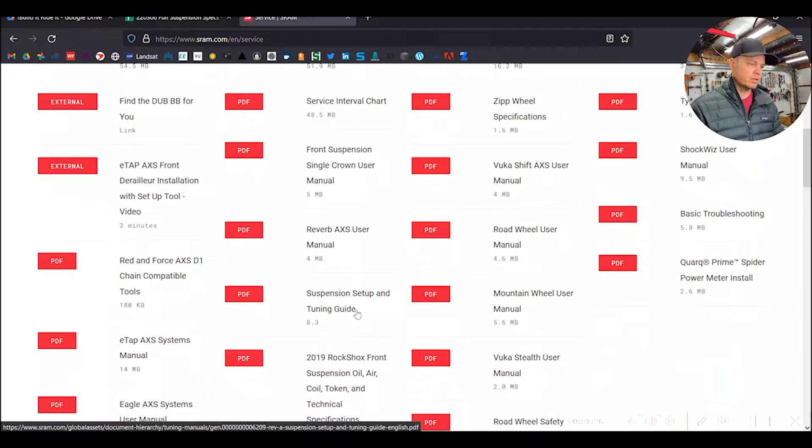Axle to crown, this actually comes right from SRAM's specs. They have them on their website. So if you're looking for this information, I haven't seen anything terribly updated, but if we go to SRAM's website, and if you scroll down to the bottom, which is manuals, documents, and videos, they have, for 2019, luckily for me, these technical specs.

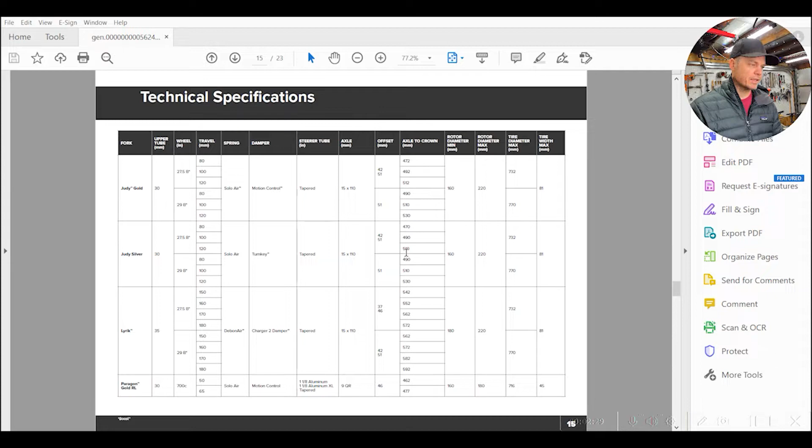I was looking through some of this other stuff, and I didn't see anything equivalent to this to show the axle to crown. They used to have the axle to crown specs actually in the literature on the web page for a particular fork, and maybe they do now again, but they took it off for a while. So anyway, if we go in here and we open this up, you want to go down to technical specifications, zoom in a little bit.

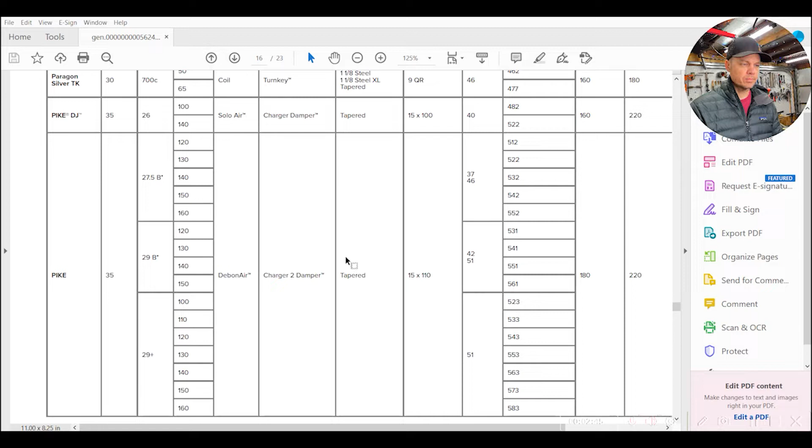If we find the Pike, these are the 29, and then I've got a 51 offset. So 130 travel, come across, the axle to crown is 541. So that is how I got to this number.

Sag, what we're going to be running in sag is basically the percentage of the travel that when you sit on the bike, the fork compresses that much, right? So the travel is 130, 20% of 130 is 26 millimeters. And so that means that sag axle to crown is 515 millimeters. And then, like I mentioned before, the rake or the offset, it's 51 millimeters.

So, all that to say, that's really the starting point. We need to know our axle to crown and our rake as we start to go down the path of actually drawing the bike. So first thing I do, I just draw a vertical line and I offset it 51 millimeters. And then I connect these two things. Zoom out a little bit.

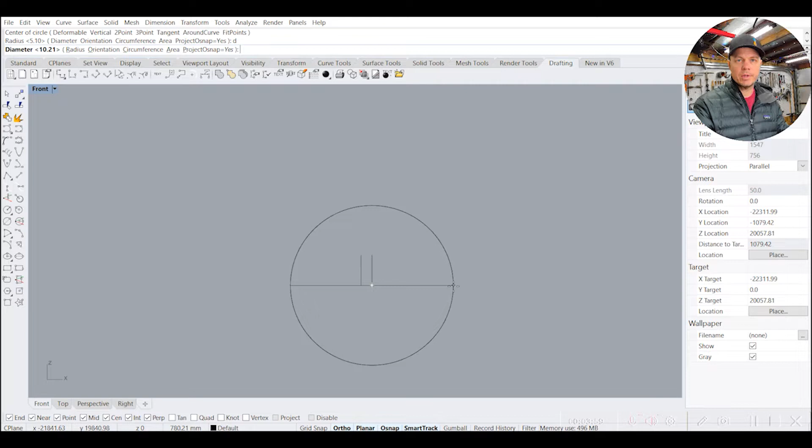I'm going to put a point here, and that's really the center of the front wheel. And I'm going to draw a circle, and this circle is going to have the radius of the axle to crown compressed. So 515, if I remember right. Sorry if I said diameter before, radius of 515.

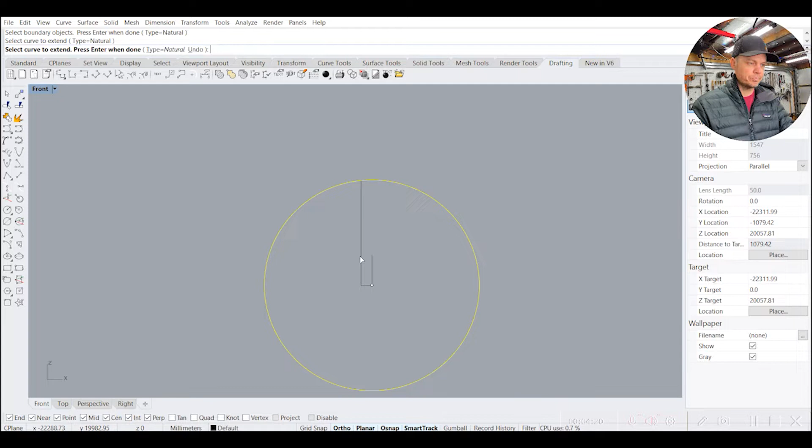And then we're going to extend to here. This line, right? So then when we draw a line from here to here, it's going to be on the circle. And so we know that's 515 millimeters, right? If we want to be sure, we can measure it. 515.

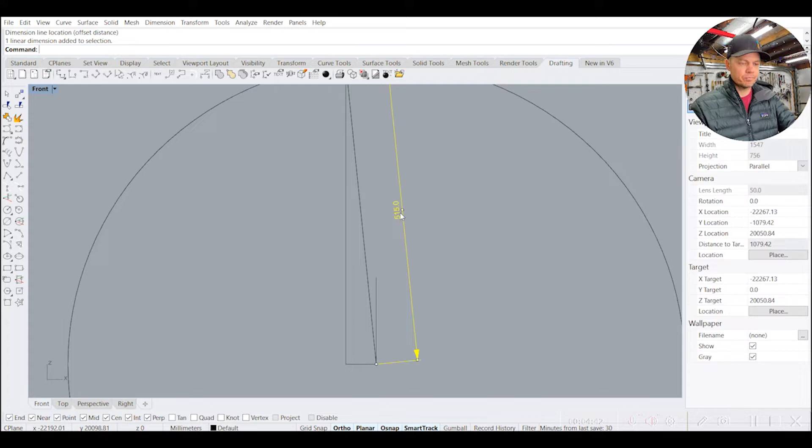And just to go back to that initial spreadsheet, 515 sag axle to crown. Again, we got that by taking the full axle to crown on the specs, subtracting the sag, and getting that axle to crown. The next number we need is the head tube angle. So the head tube angle is 66 degrees. So that line that we drew that's vertical is now going to tilt back to 66 degrees.

So we're going to rotate this with this as the center point, that front axle, and it's going to be rotated 90 degrees minus 66 degrees. So we're going to do 24 degrees, right? And we'll put a point there, and that'll be the base of the head tube, and also that lower headset cup really is what we're looking at there.

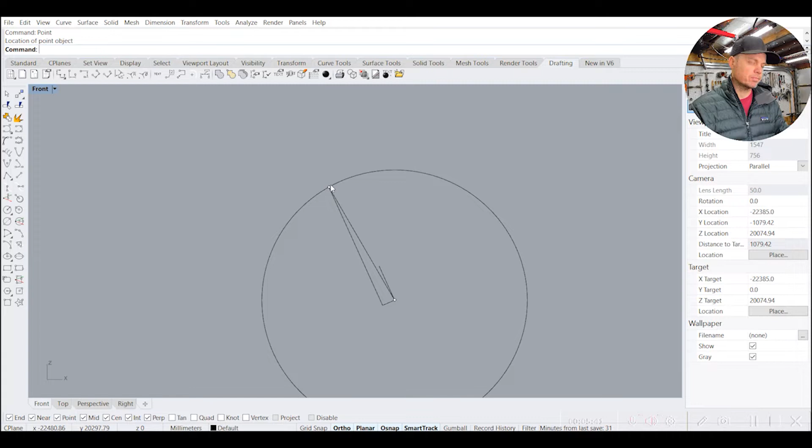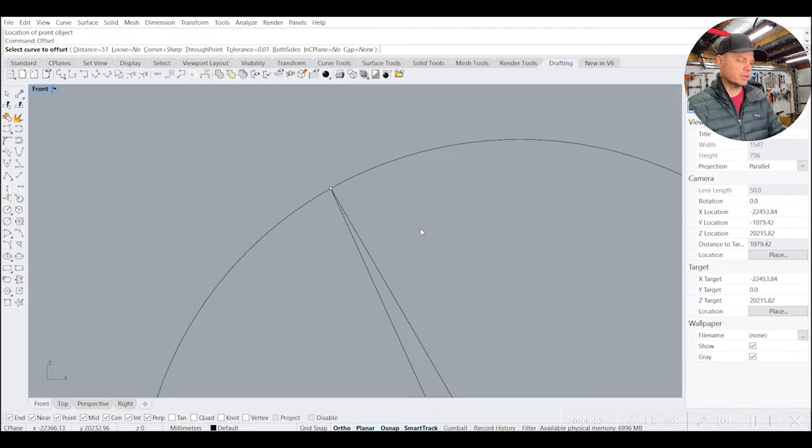So the next thing we want to do is offset this by the head tube diameter. In this case I'm using a Paragon Machine Works 1.5-inch head tube, and so it is 47.6 millimeters in diameter, and then we're going to divide that by 2. So 47.6 divided by 2. Zoom in, and so I just offset that center line by the radius of the head tube, and draw a line from here to here. And because I offset it, it automatically goes through that point. I'll keep those.

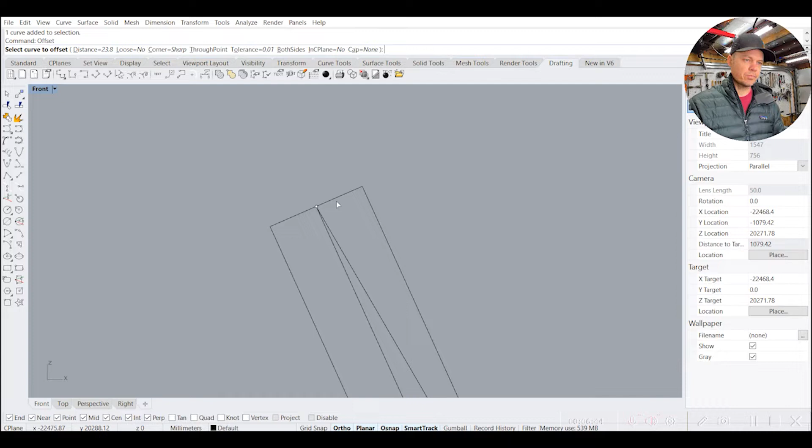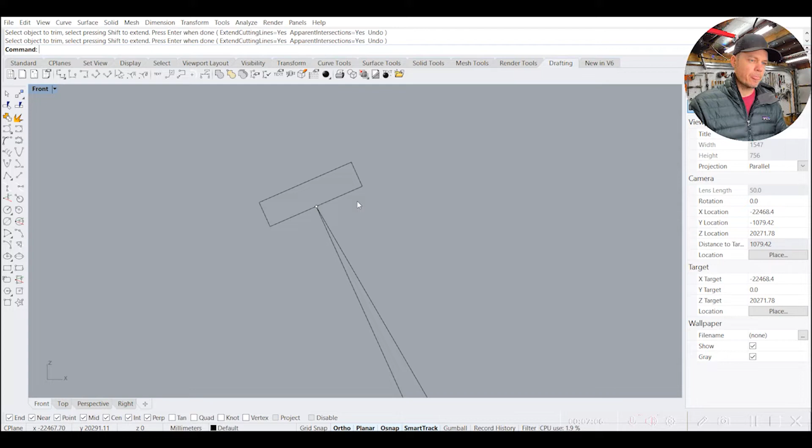So the next thing I want to do is offset the bottom line that runs through this point by the headset cup depth. And headset cups are 1/2 inch, so 12.7 millimeters. Okay, so I just extended these 2 lines up here, and this really represents the lower headset cup. So if I trim these now, I have that lower headset cup all set up.

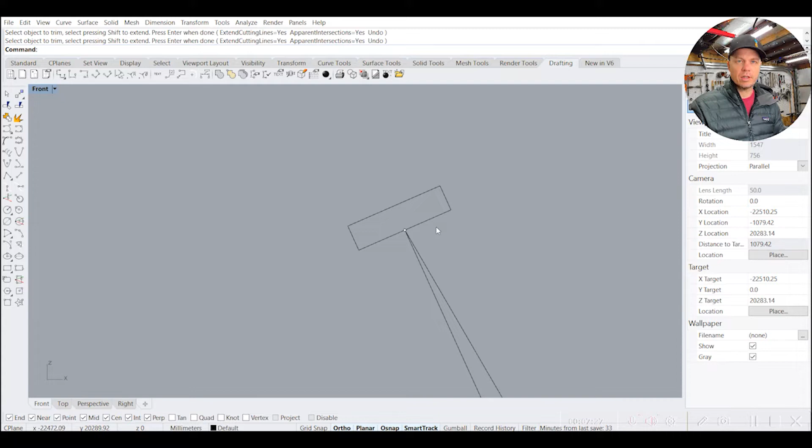The next thing I want to do, delete this line, is figure out where the top of that head tube needs to be. We go back here, front wheel bottom bracket drop. I want it to be 58 millimeters. There's a slight difference between the front wheel and the rear wheel. I'm going to run a 3-inch tire on the front and a 2.6 in the back. So 725 front wheel diameter, and the rear wheel diameter is 715.

So really what I'm trying to do is hit roughly 55 millimeters on average. If we take the difference in the radius of these tires, it's 5 millimeters, and so 58 minus 5 will be the rear bottom bracket drop; the average of those is roughly 55. It's 55 and a half. So I'm going to use that 58 number. The other number I need is a stack. So how high above that bottom bracket does the top of the head tube sit? And so 58 and 625 are those next 2 numbers that I need.

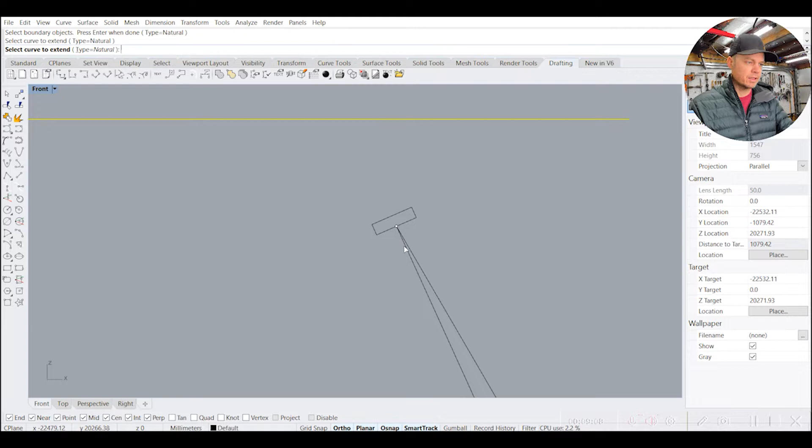So to get the drop, I'm going to offset this line, which is the axle, 58 millimeters downward. And so the bottom bracket is going to lie somewhere on that line. And then I'm going to offset this up 625 to figure out where the top of the head tube needs to be. And we extend this line up to the top. Here we see that the length of the head tube is going to be roughly 118 millimeters.

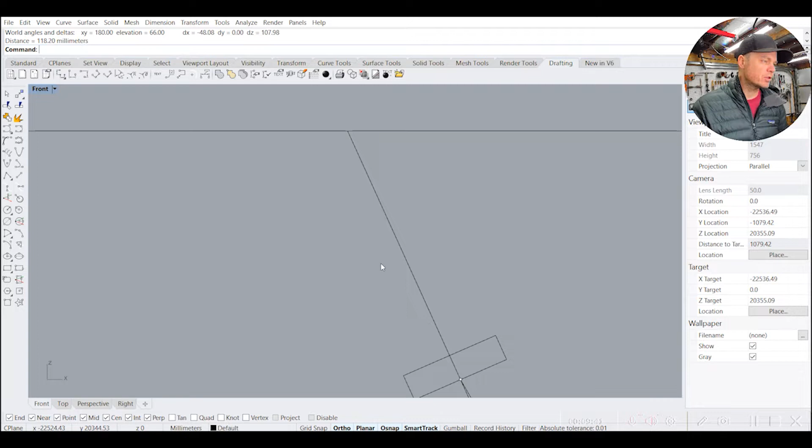Head tubes come in size increments of 5 millimeters. They're not cut to size, or at least the ones that I'm using. So I could go up to 120 and have a little bit more real estate on the head tube to weld the top tube and the down tube to. But I actually want a little bit more real estate in the stack. My son is going to be riding with me on this bike. He's 3, and so we have one of those Mac Rides, and I need a little bit of extra room with the headset spacers so that I can install the Mac Ride. So I'm going to use a 115 millimeter head tube.

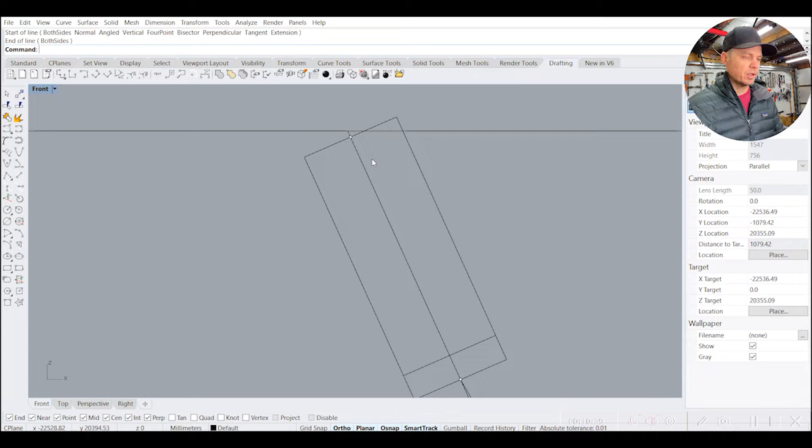So I'm going to offset this line here 115 millimeters, and then I'm going to put a point right here, and draw two lines that represent the sides of the head tube, one here, one here. So I didn't quite get to my desired stack height, but it'll be fine. That stack is just kind of a reference. My hands will end up where I want them to be when I actually have everything where it needs to be. So I'm going to trim this line just to clean things up. The stack height line, I'm going to make that go away.

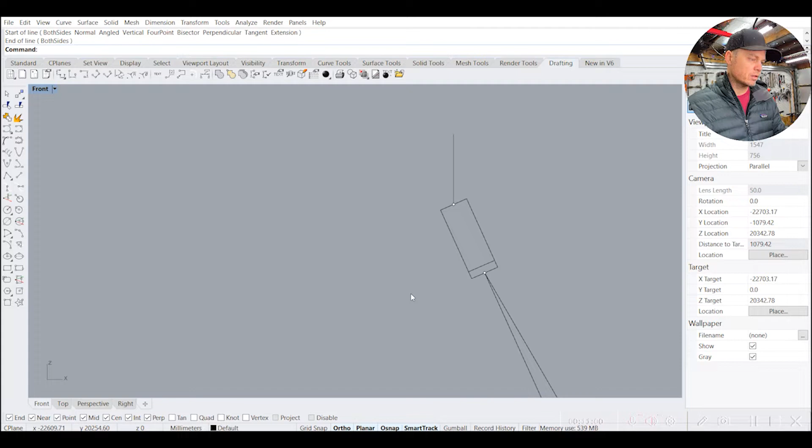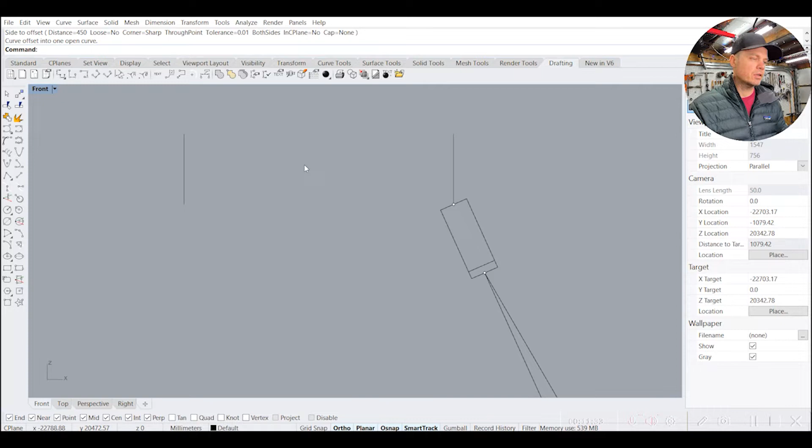And then the next thing we need to do is figure out where that bottom bracket is going to sit. So I'm going to draw a vertical line from the top of that head tube. And then I am going to go back to my reference sheet here and say, okay, what's the reach? The reach is the distance from the center line of your head tube back to the center line of your bottom bracket shell. Go back there one more time, 450 millimeter reach. So what we'll do is offset this line 450 millimeters this way. And of course, these numbers are all for me. Depending on who you're building your bike frame for, you're going to have different numbers.

You can get these numbers. The best way to get these numbers, if you're working on your first frame, is to go to the website for a bike that you have, that you like the geometry of, and figure out what the stack and reach are. Those are the numbers nowadays.

It used to be that the horizontal top tube distance was really the replacement for reach. So you can use that number, kind of a different process of arriving at the drawing in that sense. Instead, we'd be offsetting this line back that horizontal top tube distance, and then figuring out how the seat tube interacted with that to get down to the bottom bracket. This way is actually a lot easier, with reach and stack, because you find where everything is really simply.

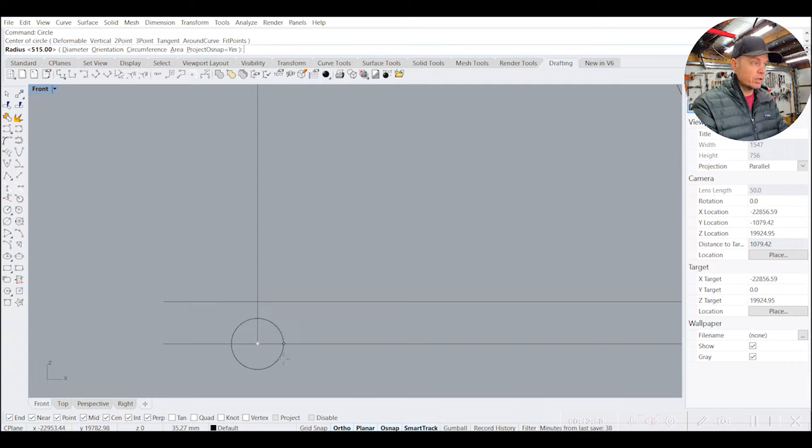So the next thing I'm going to do, I'm going to just keep doing this in the background, but I'm going to draw a point where the bottom bracket shell is going to be, and then I'm going to draw a circle. Bottom bracket shells, at least the BSA or English threaded bottom bracket shells, again, Paragon Machine Works, they're 38.1 millimeters in diameter, which is 1.5 inches. So 38.1. And now we have the beginnings of a bike. We've got our head tube, we've got our bottom bracket shell.

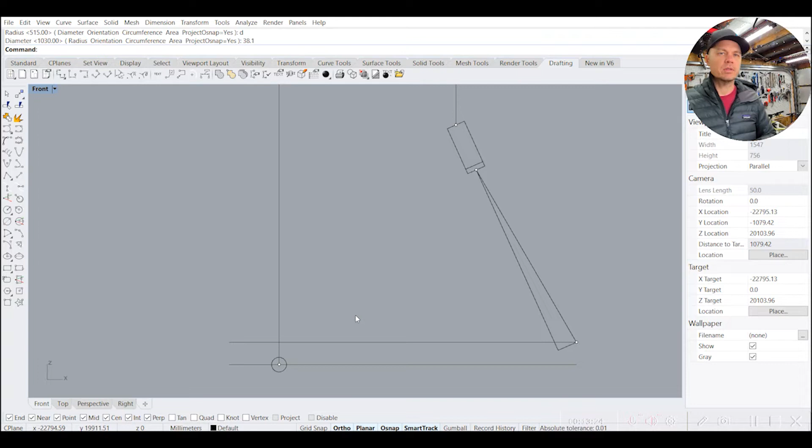And the next number that I'm going to grab here is the bottom bracket to saddle distance. This is really a key measurement as well, and you can pull it from your favorite bike: when your saddle's in the fully extended position, if you have a dropper post, measure from the center line of your bottom bracket shell to the top of your saddle, and that's really the distance you need to have for efficient pedaling. And this is the baseline of where the saddle is going to be.

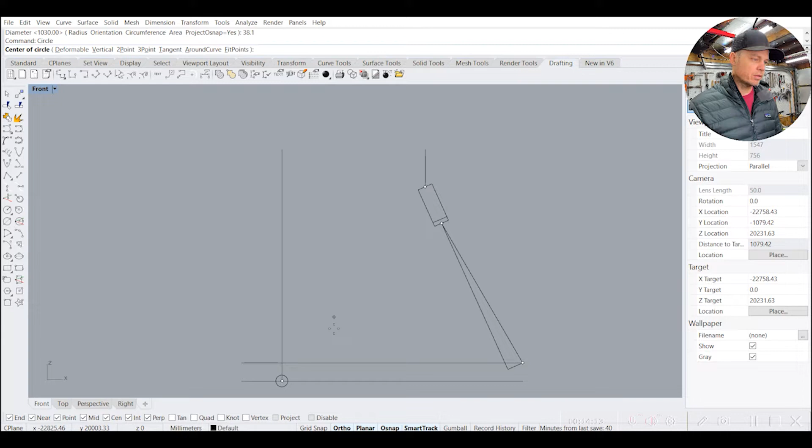Dropping back a little bit, I'm drawing this bike in sag, and most all the time you'll see bike geometries listed not sagged. And so these numbers will be a little different. Even hardtails, they'll list them at full extension. I like drawing my bike in sag because I know where everything's going to be when I'm actually riding it. All right, so circle from here, radius of 730.

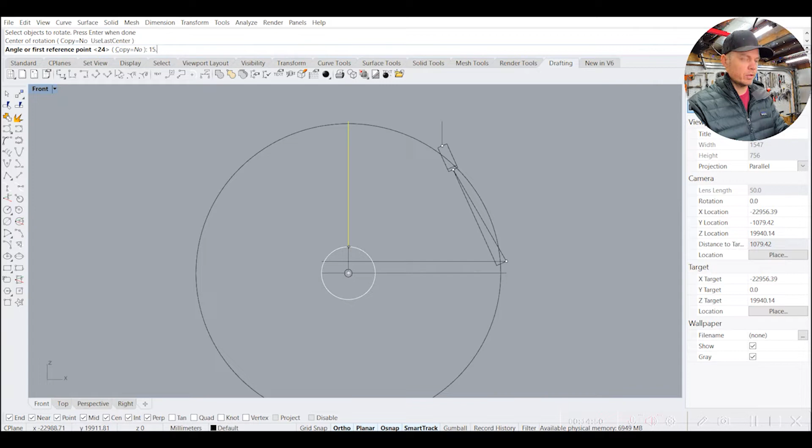And then the other number we need is the seat tube angle. We're going to run a 74.5 degree seat tube angle. So we're going to rotate this line at the center point of the bottom bracket shell, and we're going to rotate it 90 minus 74.5, so 15.5. Hopefully that's right. We can double check. 74.5, right? Should have done this before, but if we want to double check this one, 66, right? We'll come back and dimension this whole thing later, but for right now, I'm going to leave the dimensions off to keep it clean.

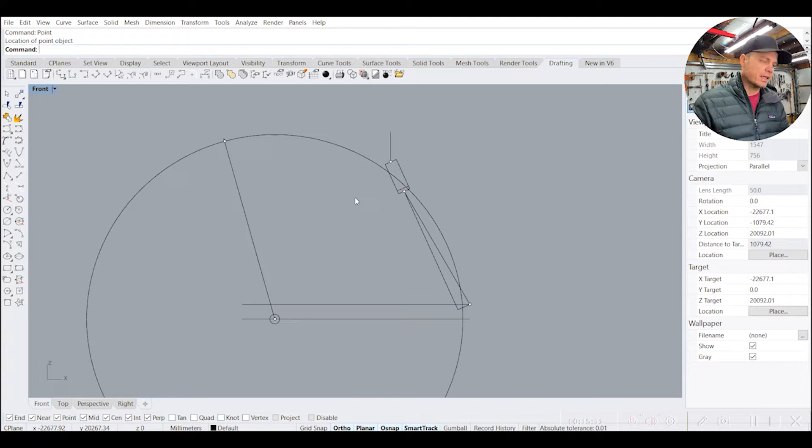And then I'm going to put a point at that saddle area. Okay. We've got a lot of good stuff going on here. Got the very basic formations of a bike. One thing I forgot to add here was the chainstay length. So this is the distance from the bottom bracket shell to the rear dropout. And what I'm trying to do here is really minimize it. I want to try to squeeze a lot of wheel into a really small chainstay length, and so I want to hit it at 400.

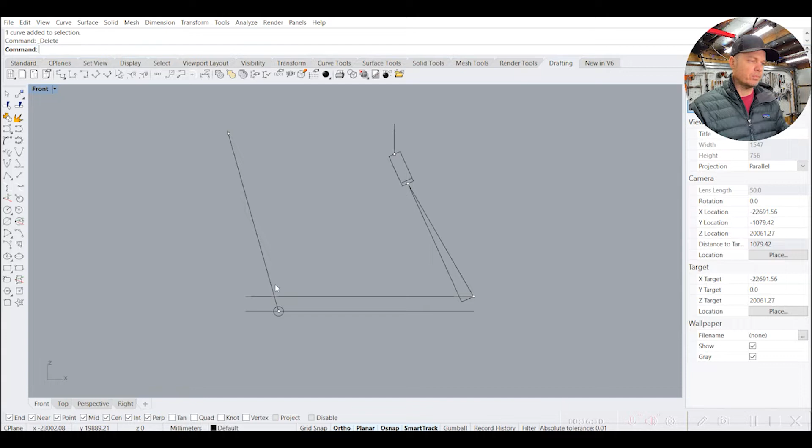Should be able to do it because it's going to be a single pivot suspension. And so the swing arm is not going to be your typical chainstay here. It'll actually have kind of a swooping swing arm that'll run out from the pivot point. A lot of times when you have your swing arm down low, there's a lot of stuff between the back of the tire and the bottom bracket shell. Here there won't be anything. So we could probably tuck it in there pretty good. So I'm hoping that 400 is going to work.

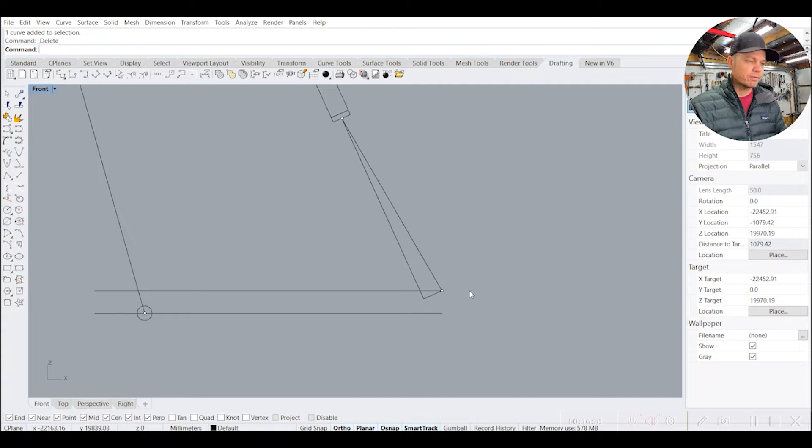I'm going to go back to the front of the bike now, but let me finish what I was doing. I'm going to draw a circle here, and this is going to be that radius of 400, which will be the chainstay length. I'm going to go back to the front of the bike. I'm going to draw a circle here that is equal to the diameter of the front wheel, and 584 is the diameter.

And so that's from here. Again, bead seat diameter is the technical term for it, and so all 27.5-inch wheels have a bead seat diameter of 584, and that's where the bead of the tire sits in that little groove, and that's the diameter of it. So I like using that as a reference point.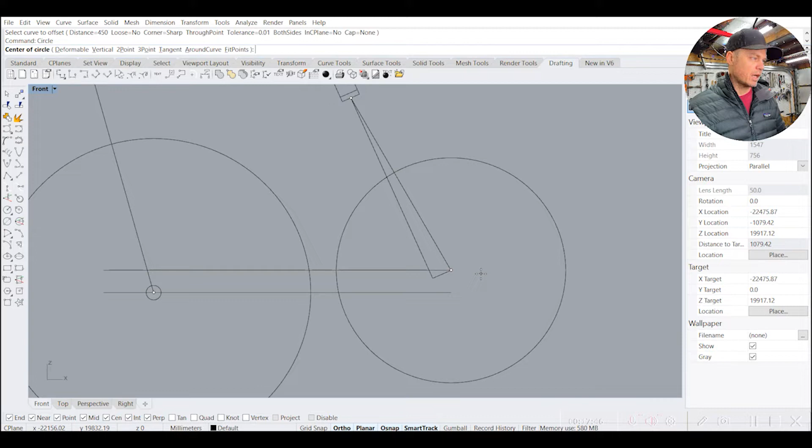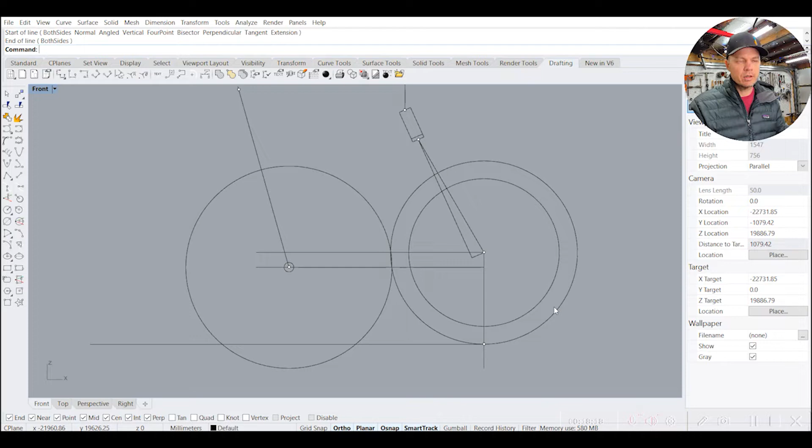And then the front wheel diameter, 725, I just measured this directly, and oftentimes I'll offset this, and I'll show you how to do that in a second. But I'm going to just draw another circle, and it's going to have a diameter of 725. Right, so this is the front wheel and tire combo. And then you draw a line down here, put a point at the base, and this here will be our ground point, so that this is where the rear tire is going to sit as well. And because the rear tire is a 2.6 and the front's a 3, there's a slight difference in diameter, which will throw things off a little bit.

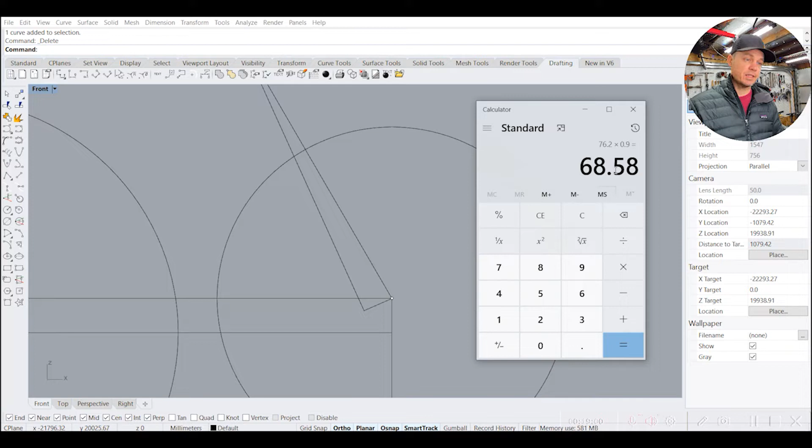The other way we can get to the tire diameter is if we just know the bead seat diameter here, and this is just an estimation technique. You can grab the calculator and take your tire width in inches, so 3, and then multiply that by 25.4 millimeters to the inch. So this will give you that tire depth, roughly in millimeters. It's a little off, so I always multiply it by 0.9, and it seems to do a pretty good job. So 68.58 would be that offset.

We'll call it 69. So if we offset this 69, you can get to more or less the same thing. And if you look at the diameter of this, you end up with 722. So awfully close. When you actually ride the bike, the tire is going to be compressed or not compressed, depending how much weight you're putting on it. So as long as you're within 5 millimeters on these tires, it's not a big deal. I'm just going to undo this and get back to my original tire here.

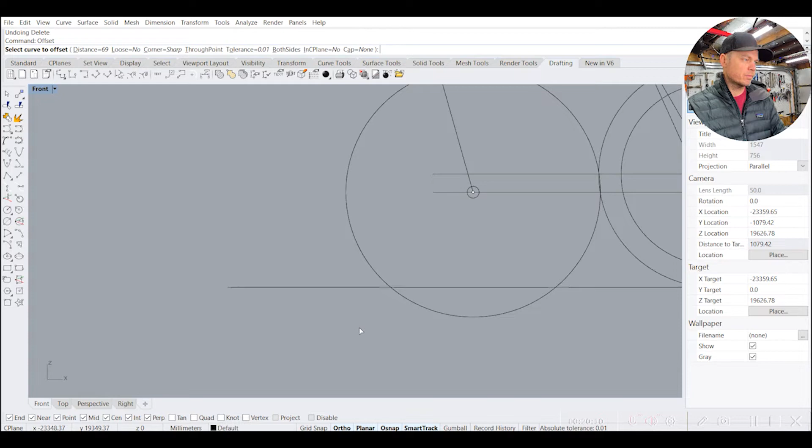And the next step is to figure out where the rear tire is going to be. And so 715, I'm going to do 715 divided by 2. And so that's 357.5. Right? So I'm going to offset. You can actually do the math in Rhino. I often do it. So 715 divided by 2.

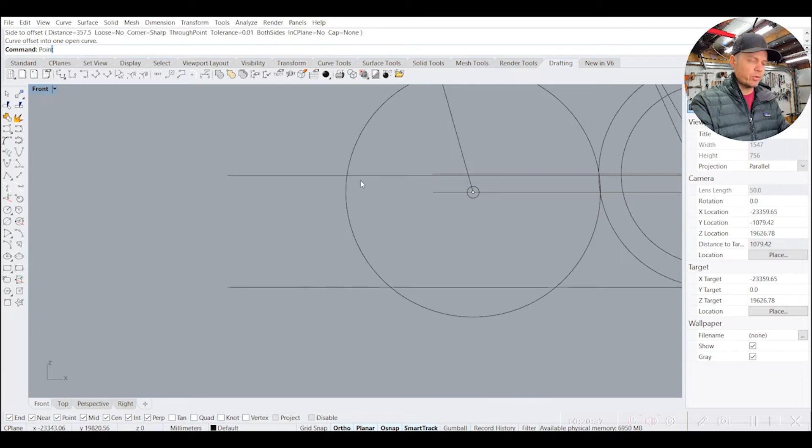And if we offset this 715 divided by 2, the center of the rear wheel is going to be at the intersection of that 400 millimeter chainstay length that we drew and the offset of the radius of that tire. So I'm going to put a point here, and then I'm going to draw the wheel and tire in: circle, diameter 584 for the wheel, and then circle, diameter 715 for the tire. And I'll keep that baseline in. I'm going to delete these lines. Okay. Save this real quick.

All right. So we've got the two wheels and tires. We know what the distance between the top and the bottom of the effective seat tube is going to be. This seat tube is going to have a curve in it, so it won't actually follow this. And then we have a pretty good idea where our head tube is going to be. So we're in good shape to start drawing the front triangle of the bike.

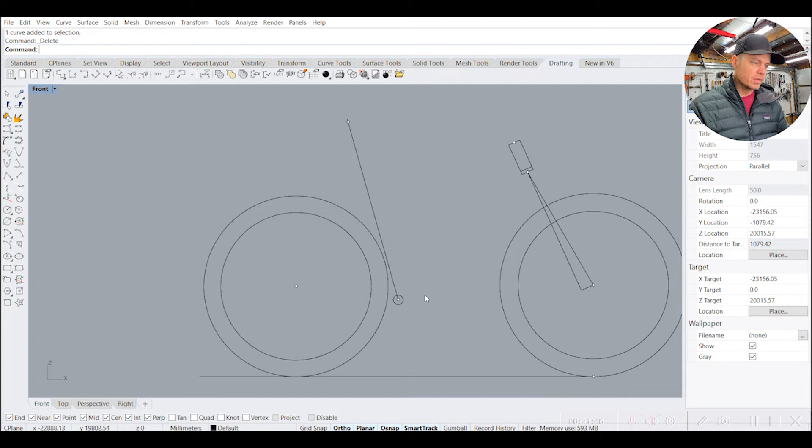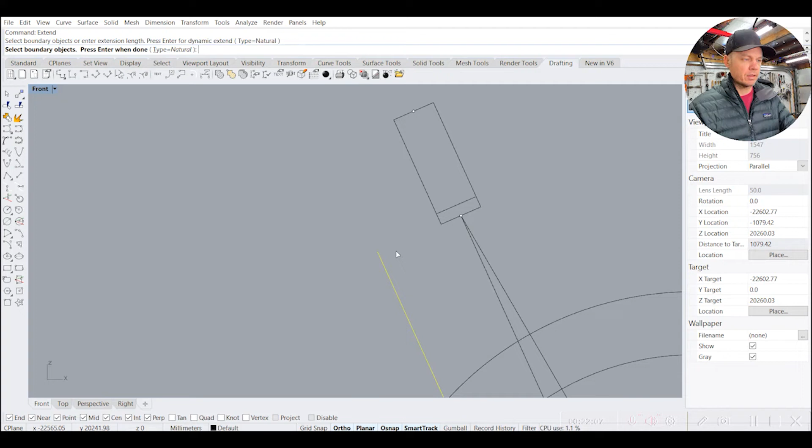And the first thing we want to do is figure out where this down tube is going to be. And the down tube needs to clear the fork. And so the fork is about 200 millimeters wide. So one side of it will be 100 millimeters, right? And that 200 millimeter width sits a little bit below the bottom of the lower headset cup, about 15 millimeters. So I'm going to drop this 15 millimeters here. I'm going to put a point here.

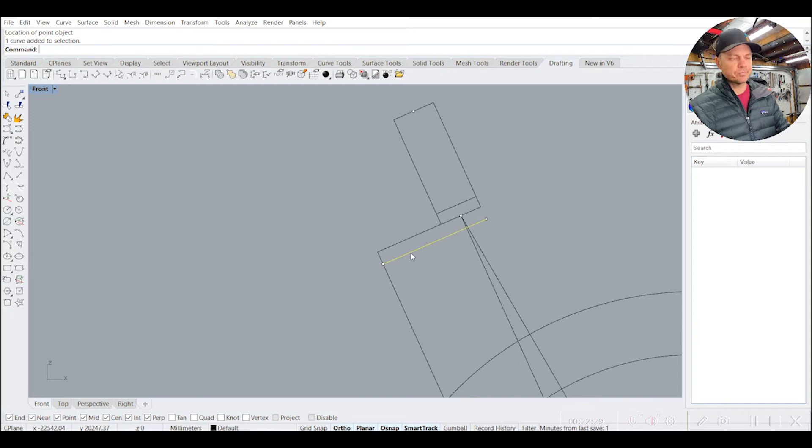Those are pretty conservative numbers. It's probably more like 190, and the drop is probably more like 17 or 19. So I like to be a little conservative so my fork isn't hitting my down tube. But in order to have some clearance here, we're going to draw a circle around here that will be 5 millimeters. Make it 5 millimeter radius.

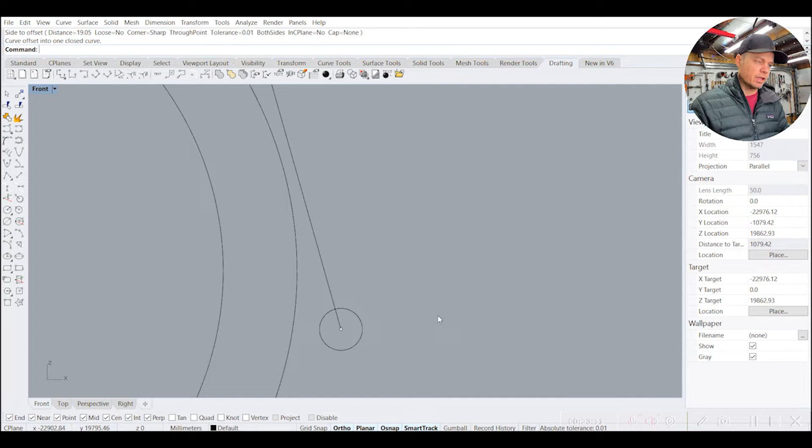And we're going to offset this half the distance of the down tube, so we'll get to the center line of the down tube. So offset this. We're going to use a 1.5 inch down tube, so 38.1 divided by 2. Offset that there, right? And now we can draw a line from the center of the bottom bracket shell.

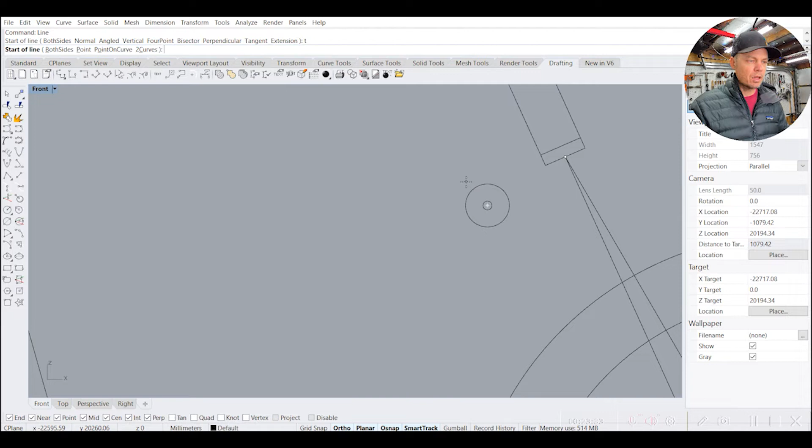And we're going to run that tangent. Run a line tangent. Sometimes Rhino is funny this way, to start in certain orders, whereas with AutoCAD you can kind of do whatever. So I'm going to draw a line tangent to the circle, to the center of the bottom bracket shell. And then I'm going to extend this to the head tube. Right, and so that's the center line of that down tube.

I'm going to offset this 38.1 divided by 2. And so this will clear the fork. That little dot, that point, represents the corner where the fork is. So it'll clear it by at least 5 millimeters. The other thing we want to make sure, we want to see what the distance here is. 14 millimeters, which is fine.

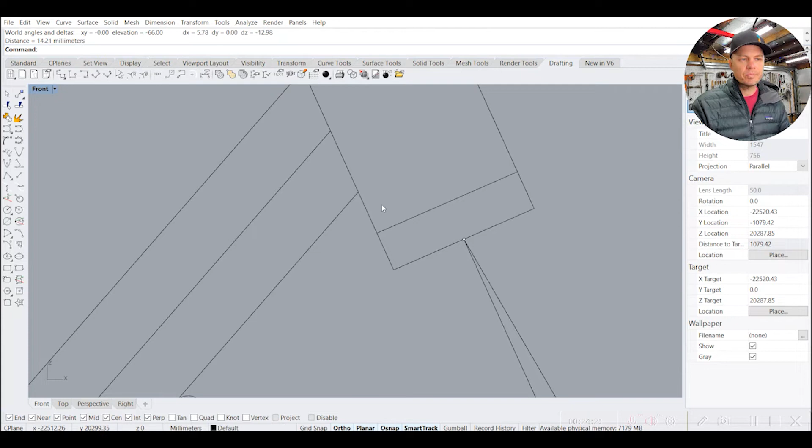The Paragon Machine Works head tubes, they kind of look like little, I don't know, little nuclear power plant silos. And so there's this little lip here that, actually, I'll get one just to show. Hold on one second. All right, so Paragon Machine Works head tube. You see this little lip here, and this is about 10 millimeters between the edge and where this lip radius stops.

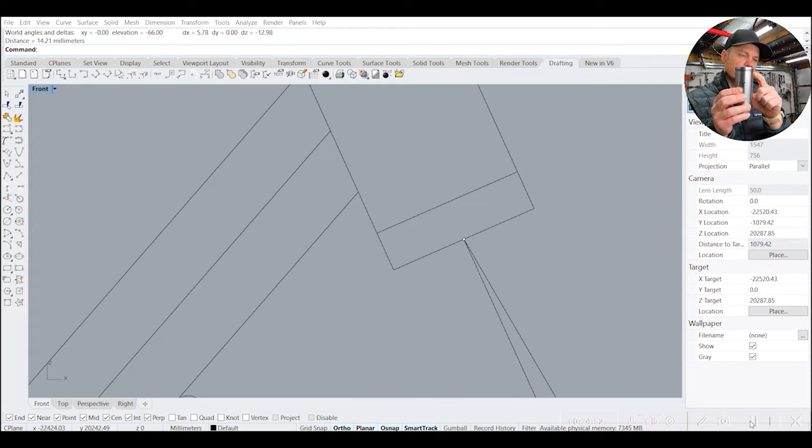So I always like to just double check to make sure that the distance between the bottom of the down tube and the bottom of the head tube is more than 10 millimeters, so I'm not running into that lip or the curve that goes down to the lip. Okay, so we got our down tube in. Next, again, I'm just kind of cleaning up as I go here.

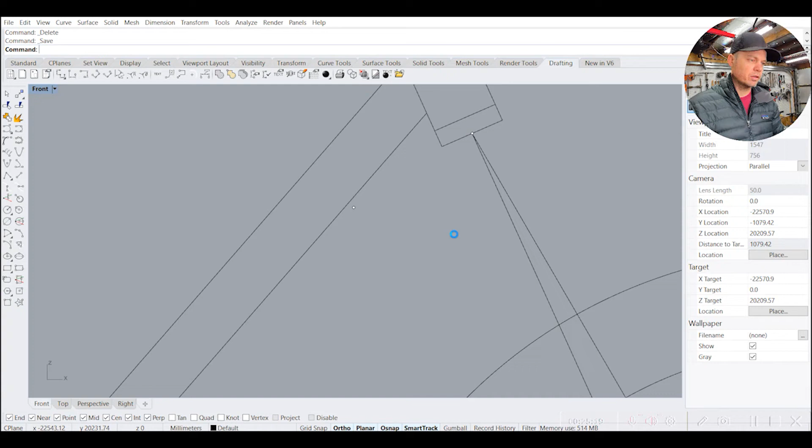The next thing I want to do is draw in the seat tube. And so for the seat tube, it's going to have a bend in it to clear the suspension travel and just allow more space for the wheel. And the beginning part is just going to be a vertical line up.

And then there's going to be a bend, and then the seat tube will go generally this distance so that when the saddle is set at this height, it will be at exactly the right spot, to be at the 74.5 degree seat tube angle and that 730 millimeter distance.

So the other thing we need to consider is the pivot point for the suspension. And for this one, rear wheel diameter, rear tire diameter, we worked on that. Rear travel is going to be 110 millimeters, and rear sag 33. We don't need to get into all this quite yet. Let me add one more thing here.

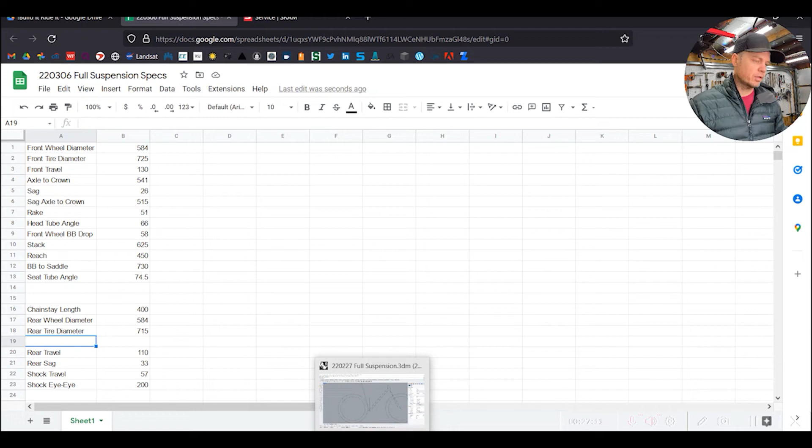What we want to do is figure out where we're going to put that pivot point. I'll go into all this decision making in another video, but where I want the pivot point is right at the top of, or even the center line of, the chain, where the chain goes around the front sprocket. And there's reasons for that. For the single pivot, it gives a more consistent type of suspension performance if you get that point right at the top of your chain ring.

And so to figure out what this distance needs to be, we do a little bit of math in the calculator. Of course it's going to depend on what size chain ring you run, right? And surprisingly, chain ring diameter has a lot of effect on how your suspension performs, which doesn't necessarily seem intuitive, right? So I like running a 34. I run a SRAM Eagle 10-50 cassette.

And I'm always going back and forth between a 34 and a 36. I'm usually unable to push a 36 at the beginning of the season. By the middle of the season, I can usually do it. And so 34 works for me. I like the 34. I'll just keep going with it. It's just simple. You might be running a 32, you might be running a 30. So just keep this in mind as you do this. And the other thing is you might decide to move that pivot point up or down depending on what you want.

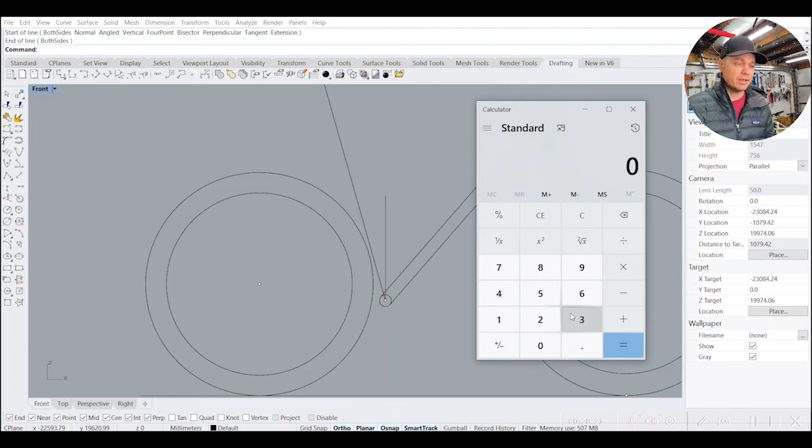You probably won't be moving it down because that kind of throws things off, but you might be moving it further up your seat tube by a couple millimeters. Anyway, I'm going off on a tangent here. All that to say is I'm going to use a 34 tooth front chain wheel.

So 34 teeth. Each one of those teeth are spaced ½ inch apart from each other. So that's 12.7 millimeters. Those are the two numbers you often need to remember: 25.4, and then half of that is 12.7. Two handy numbers when you're working in millimeters. So 34 teeth, 12.7 millimeters in between each one, gives you 431.8.

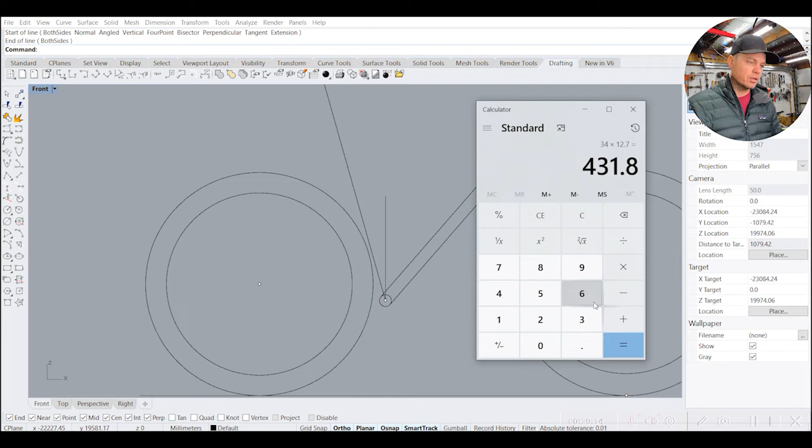That is the circumference of kind of the center line of where the chain sits, if you were to draw a circle through the pins of the chain around that front chain wheel. So 431.8 is the circumference. If we divide that by 3.1415, pi, right? That will give us the diameter. So the diameter is 137.45, and then we divide that by 2, we get the radius.

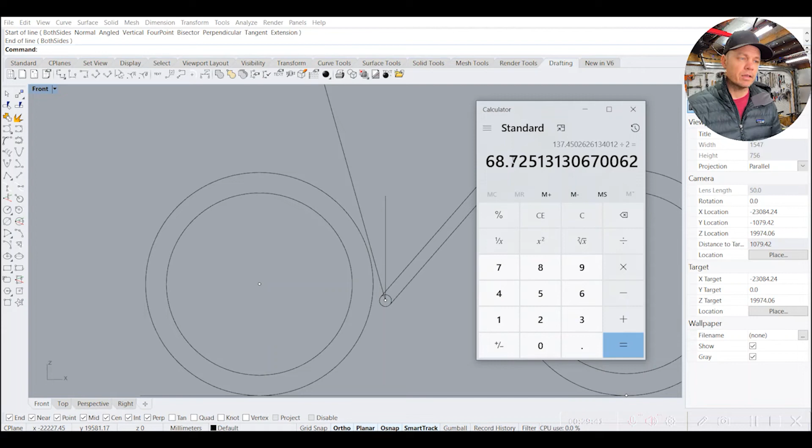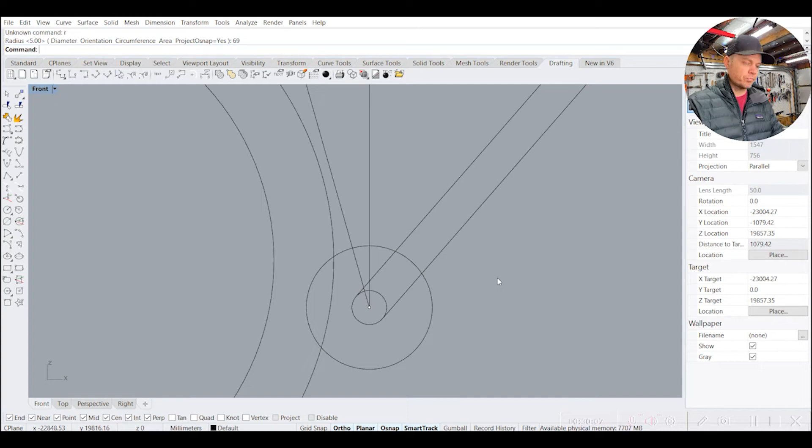So 68.7. I'm going to call it 69. We could go 70 even. I'm just going to call it 69 though. So this distance between here and the center point, pivot point, is going to be 69 millimeters. So radius 69. Okay, I'll put a point right here. All right. So this is the center point for our suspension swing arm.

And so our suspension is going to swing from this point, and we know it's going to swing through that first sag point, right? And that suspension distance is vertical distance. And we lined it out as rear travel 110. So it's going to travel 110 millimeters from the bottom of the travel through that sag point to the top of the travel, right? And rear sag, we're going to set rear sag at 30%.

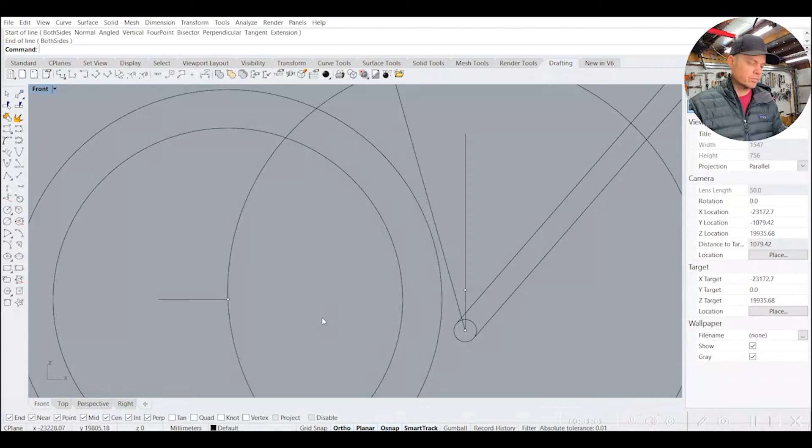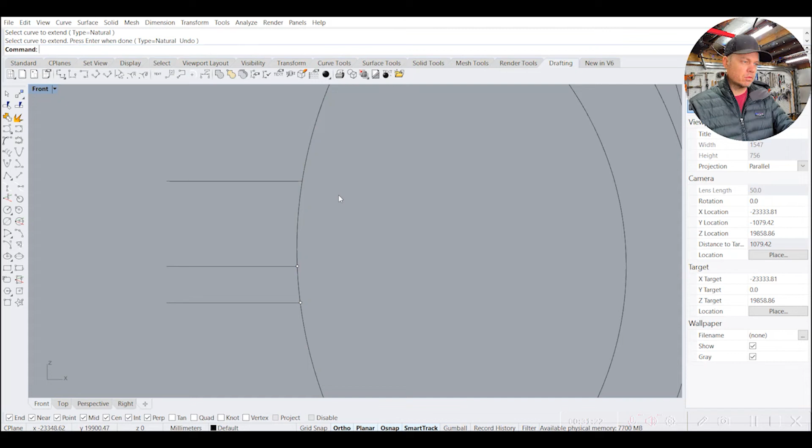Front sag, we set it at 20%. Rear sag is going to be at 30%. And so 30% of 110 millimeters of travel is 33 millimeters. So we'll offset this line up 33 millimeters, and we're going to put a point right here. And then we're going to take this line and offset it up the full travel of 110, and we'll put a point there.

All right. So we've got our travel for the rear wheel. So the rear wheel, if there's no sag, the center of it's going to be here. You sit on the bike under the right pressure, 30% sag, you get here. And then if you fully compress the suspension, you go all the way to here. What we want to make sure is that there's enough room for that rear wheel and tire when that suspension is fully compressed.

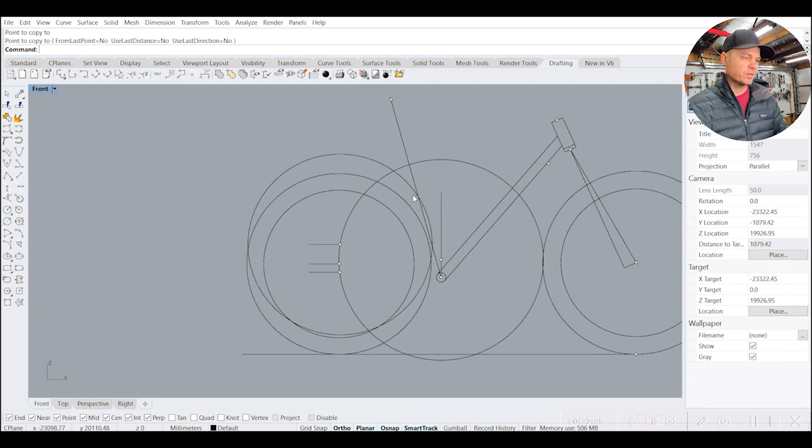So we just really need to get the rear tire from this point to the top point. And so this is where that rear tire is going to sit when the suspension is fully compressed. And we want to make sure that that tire is not hitting the seat tube. So I'm going to give myself 10 millimeters of offset here for clearance.

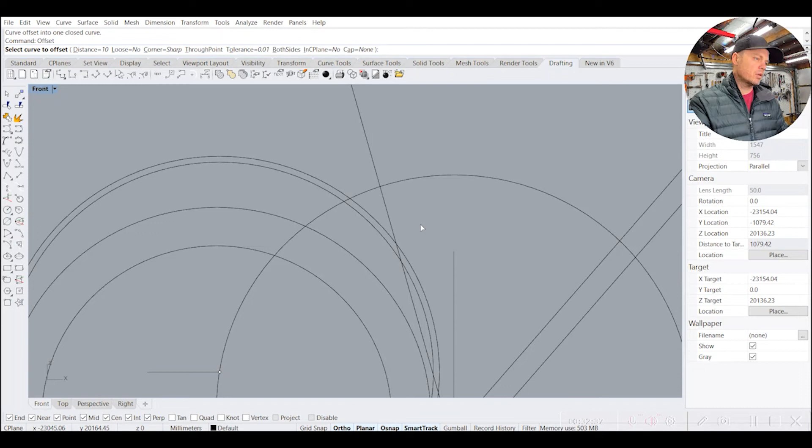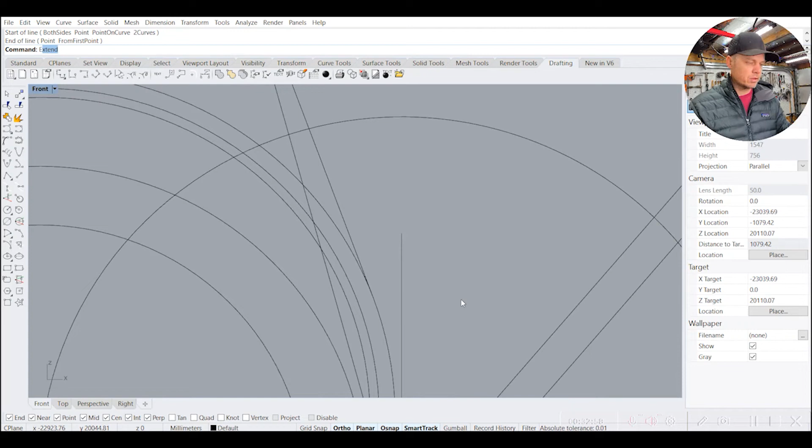And we want to get to the center line of the seat tube, just like we did before with the down tube. The seat tube is 1 3/8 in diameter, which is going to be 34.9 millimeters. So we're going to offset that curve 34.9. And then we're going to do the same thing we did before with the clearance for the fork. I'm going to draw a tangent line from here to this point here. I'm going to extend this down to that vertical line that I drew.

Okay. I'm going to clean some of this stuff up. I'm going to take the pivot off. I'll leave these lines here; they can be helpful just to sight things. The next step is the bend of the tube that we're going to use. And so I've got one of the Cobra Frameworks tube benders, and the block that I have for the tube bender is a 230 millimeter radius bend. And so I'm going to use the fillet command, and then we're going to rate the radius as a 230.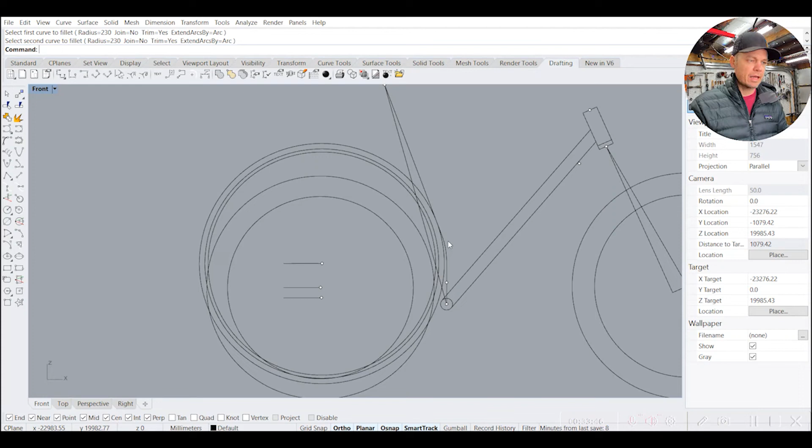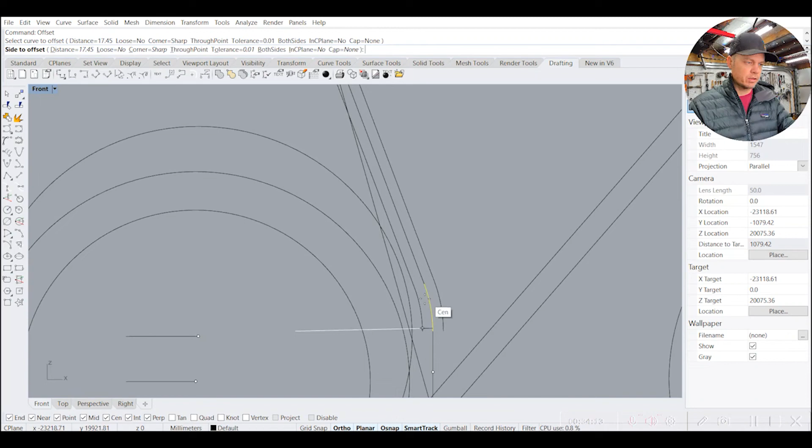And so this is what our seat tube is going to look like. And if I delete the center line, and if I delete the offset line too, and then offset this line, again 34.9 divided by 2, here, here, here, here, here, and here. And I'll delete, this is the initial seat tube line. And you can see that when the suspension is fully compressed, that there's clearance here between the tire and the seat tube, which is what we wanted.

Okay. Leave those as well. And then I can even clean some of this stuff up. So I'm going to trim this. And the seat tube will sit behind the down tube in a notch when we're actually assembling the frame. Okay, well, the next step is to figure out where that top tube is going to sit. And so what we want to do is figure out what our standover height is going to be.

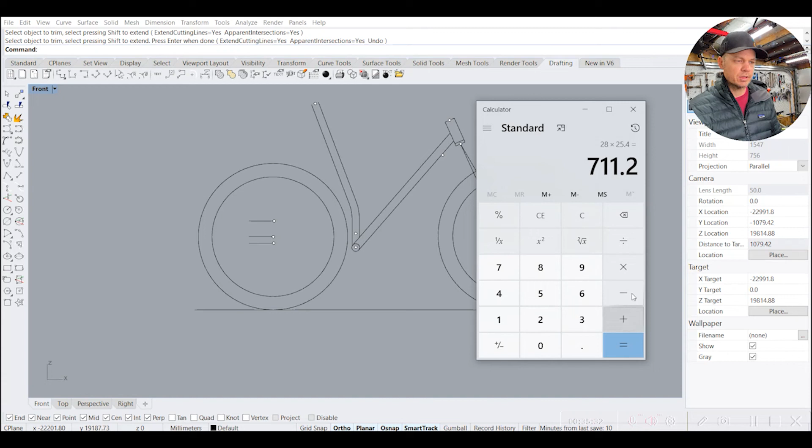And so for standover, my inseam's like 31. And so I'm going to use 28 inch inseam, or standover height. And so 28 times 25.4. Let's see what this number is. It'll be 711. It's good. I'm actually going to make it 710 just to keep it easy. And so I'm going to offset this line, 710.

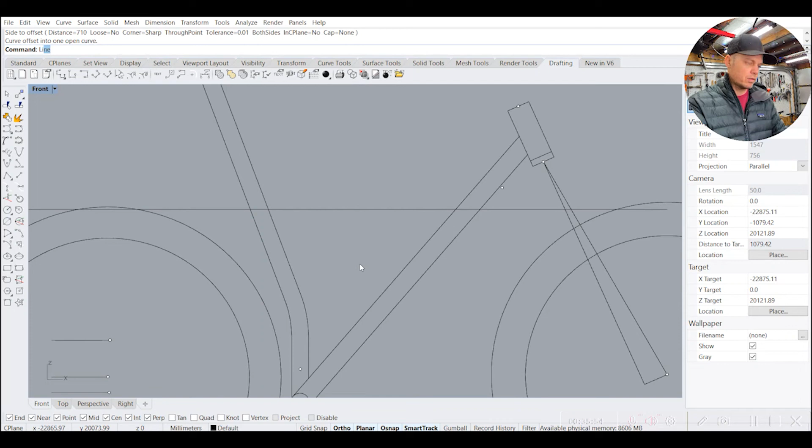All right. And 710, I just draw it through the bottom bracket shell. I mean, you can say it's a little bit in front of there, 50 millimeters or something like that. These are just numbers that I fudge a little bit typically. And so this will be fine. I end up having a little less clearance on this bike and other bikes than you might have on your typical full suspension mountain bike, and that's because I want to put a bigger bag inside the bike for bike packing, and so I really want to maximize that in-frame space.

And so if I wasn't trying to put a bag in there, I might do it at 26 inch inseam, or even a 25. Something along those lines. But because I'm trying to put a bigger bag in there, I'd like to get something that I'm not destroying myself on every time I try to get on and off the bike, but also something that is giving me plenty of space for a bag.

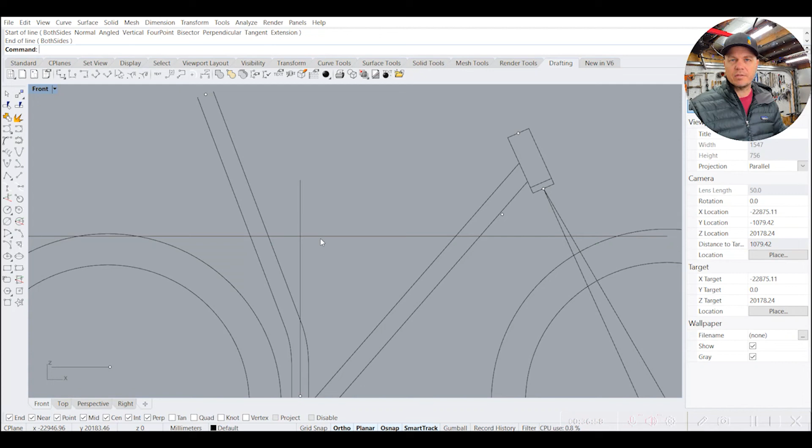I'm going to offset the top of the head tube 15 millimeters to locate the top of the top tube. And the top tube will run through that standover point and to the seat tube. Now, if we're using a straight top tube, this is all that we do, and this is going to be a 1.25 inch top tube, so it's 31.8 millimeters. And we just call it good, right?

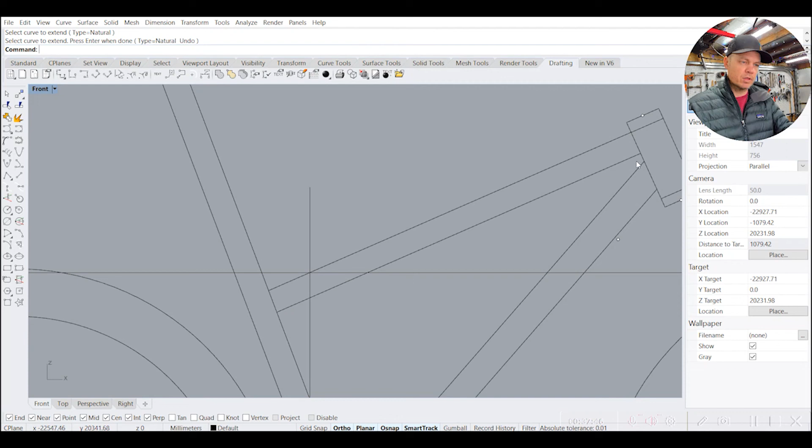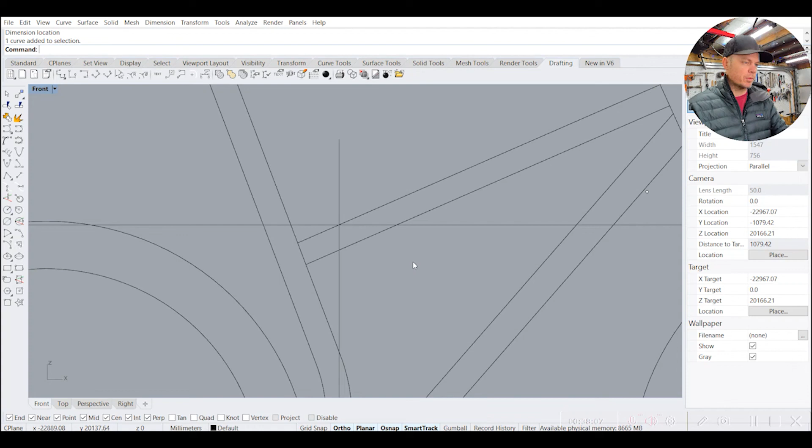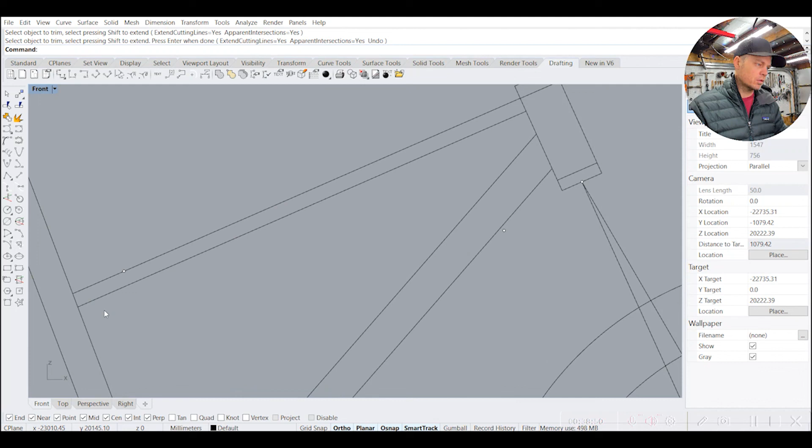Exactly 90 degrees. So I'm going to put another point here. So, we draw that top tube, we'll be good to go. But I'm going to end up using a bent top tube just because it'll look cool and just have a slight bend. And so I need to find the center line of the top tube. So I'm going to offset this again, 31.8 divided by 2 to find that center line. And I am going to draw a point here. And a point here for reference.

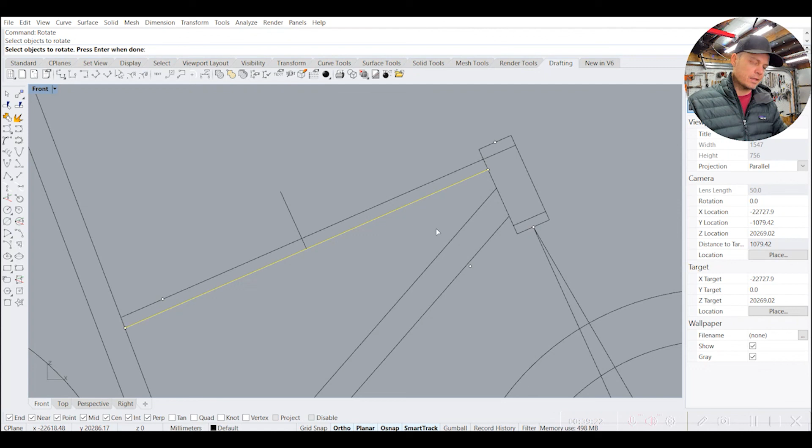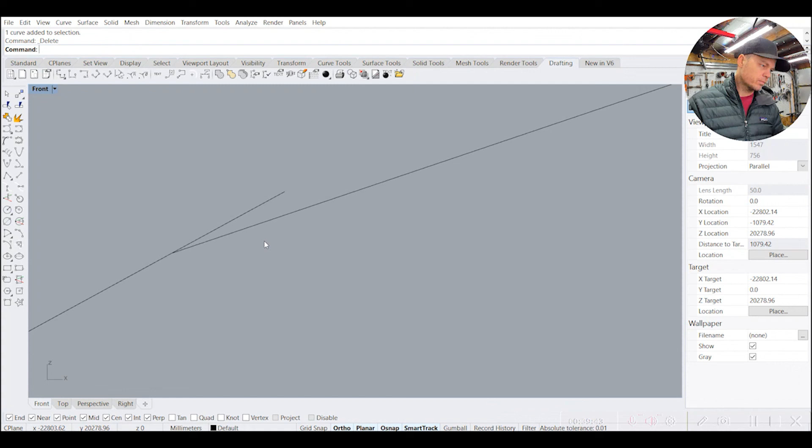The next thing I want to do, I'm just going to rotate this. I want to find a line that goes through this midpoint of this top tube and is perpendicular to it. And then I'm going to rotate this line by 5 degrees. And then I'm going to draw a line from the intersection here to this point. And that represents the center of the tube that I'm going to run. Something got funky there.

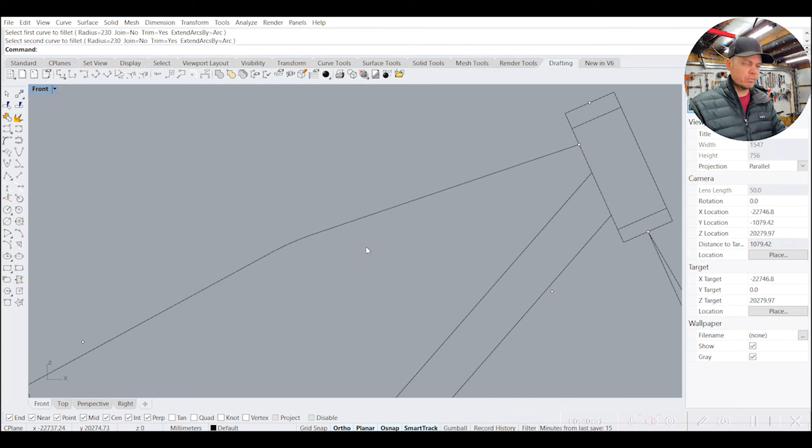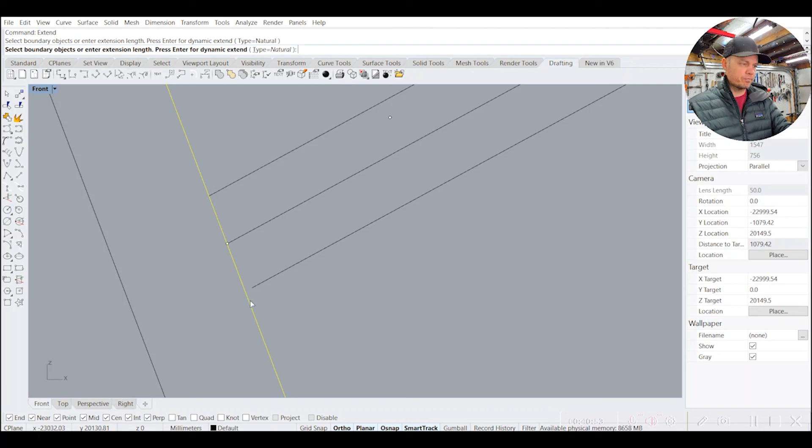Okay. So this is the center line of the tube I'm going to run. And just like our seat tube, the bending die I have for 1.25 inch tubes, 31.8 millimeter tubes, is 230 radius. So we're going to do a fillet, 230, and then we're going to offset this 31.8 divided by 2. And you can see this is actually a little bit over that standover point. So still, again, I'm not worried about this, but something to consider as you draw your bike, where you want your standover to be.

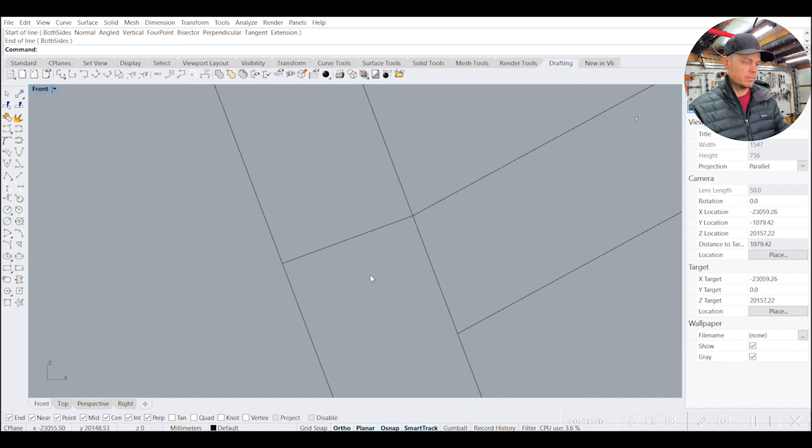All right, so those are all the tubes for the front triangle. The next thing we want to do is just finish off this seat tube here. We're going to run perpendicular here. And I'm going to offset this 30 millimeters up. I usually run 25 or 30, an inch or a little bit more than an inch. The top, and then I do want to make sure that there's plenty of room for a dropper post. And so, yeah, 320 is plenty.

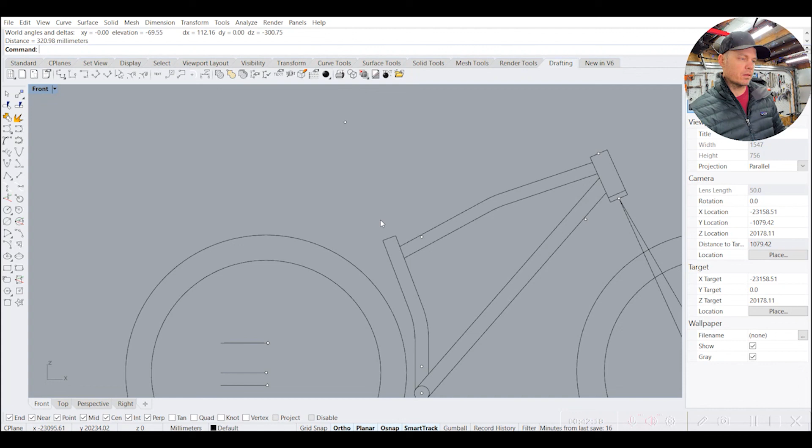I think the RockShox 150, it's about 290 millimeters from the top of the saddle to the base of the collar. And again, I'm going to run this kid seat on here. So I want to make sure that there's enough room for it. Cool. So that's the front triangle.